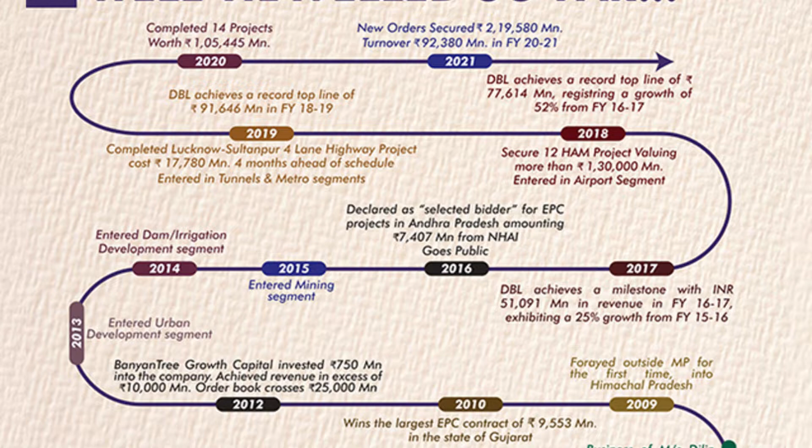We started the journey in 1988 and travelled so far with the annual turnover in 2021 of 92,380 million, along with new orders of 2,19,580 million.

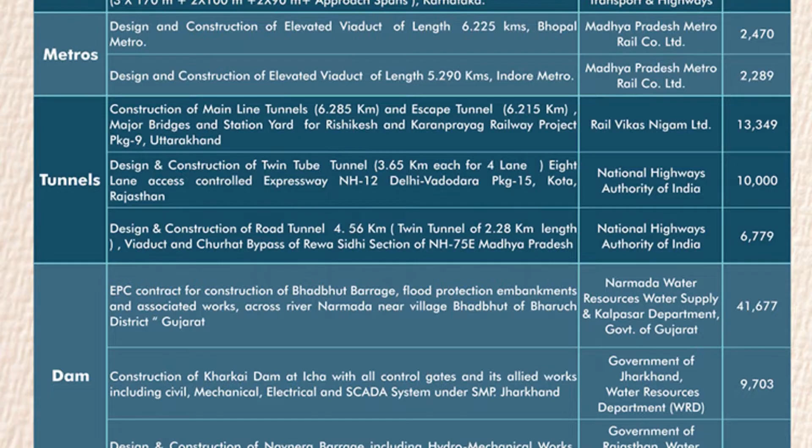Coal mining details. Dilip Buildcon has got a contract from Coal India owned Mahanadi Coalfields Limited for a mine developer cum operator contract for the development and operation of the huge Siarmal open cast project.

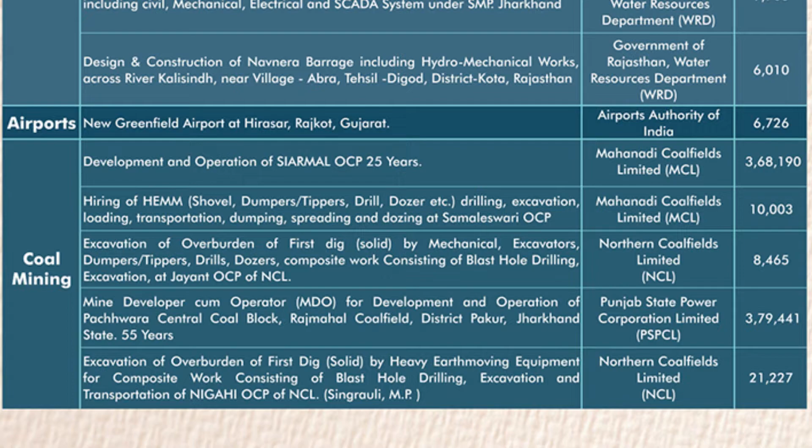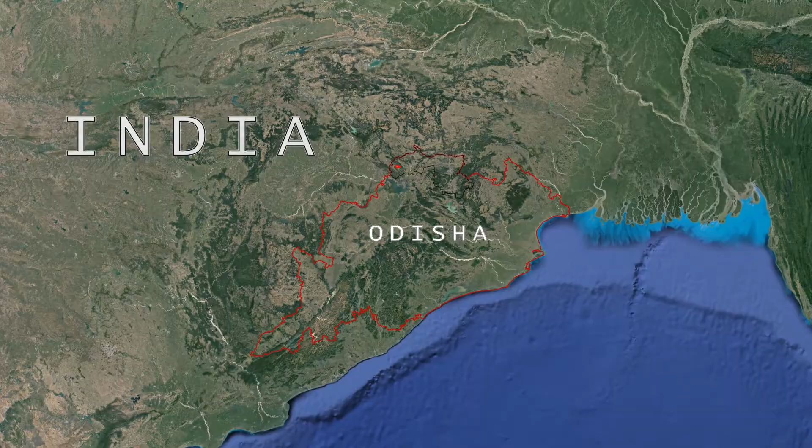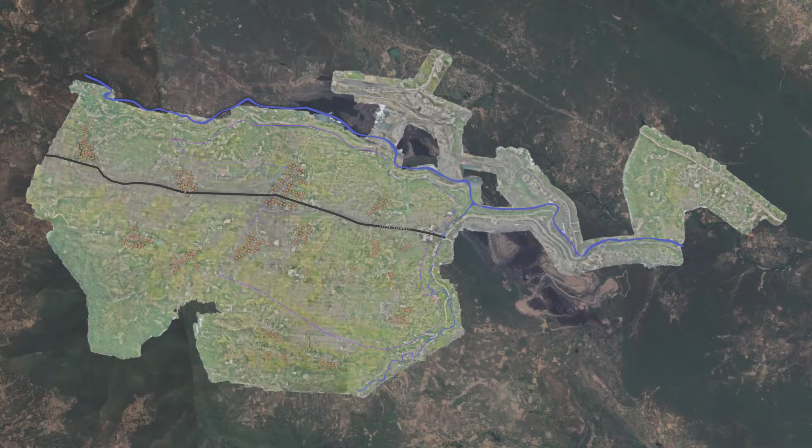The Siarmal open cast project is located in the northwestern central part of the IB Valley coalfields of Odisha, known as Gopalpur sector, and falls mainly in Sundargarh district of Odisha. The contract value is Indian rupees 36,819.07 crores and the contract period is 25 years. Mine lease for life of the mine.

Mine ultimate pit limit. Mine working boundary for 25 years as provided to Dilip Buildcon Siarmal Coal Mines Private Limited. The area consists of 5 villages, namely Siarmal, Jhupuranga, Tumulia, Ratansara and Gopalpur. Sundargarh-Raigarh Interstate Highway passing adjacent to the OCP.

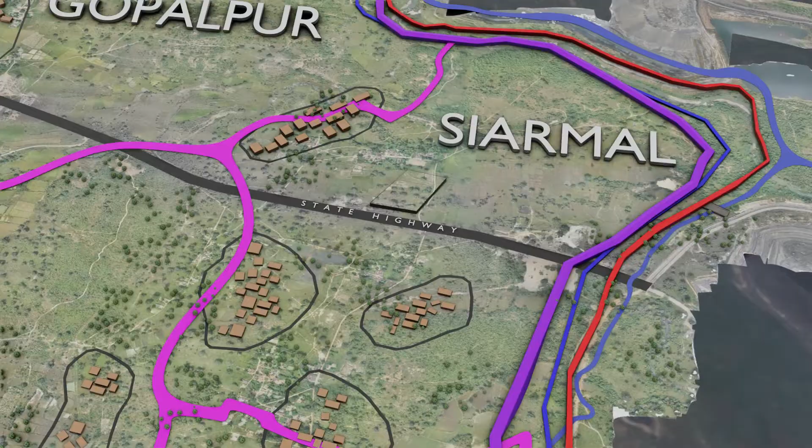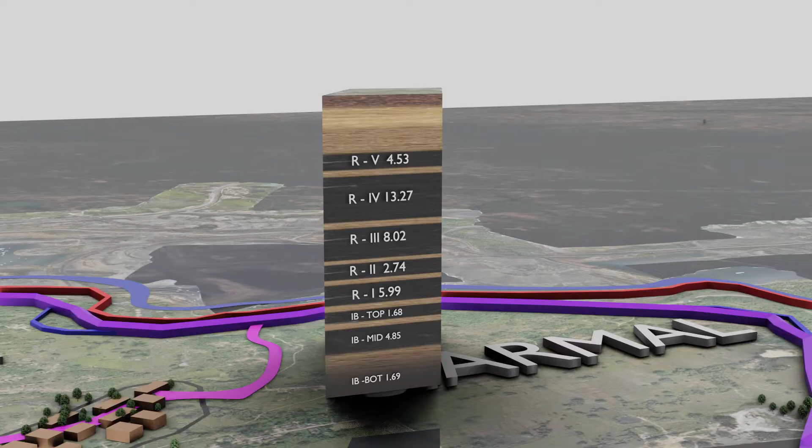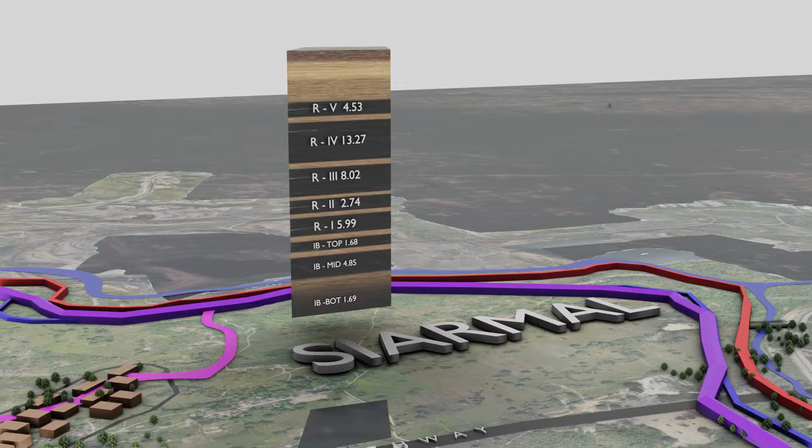In Siarmal and Siarmal Extension and Banapatra block, a total of 16 correlatable coal horizons or seams have been identified. Among these seams, Rampur 1, 2, 3, 4, Lajkura 1, 2B, 2T1 and Lajkura 4 are the most potential thick coal horizons in this block.

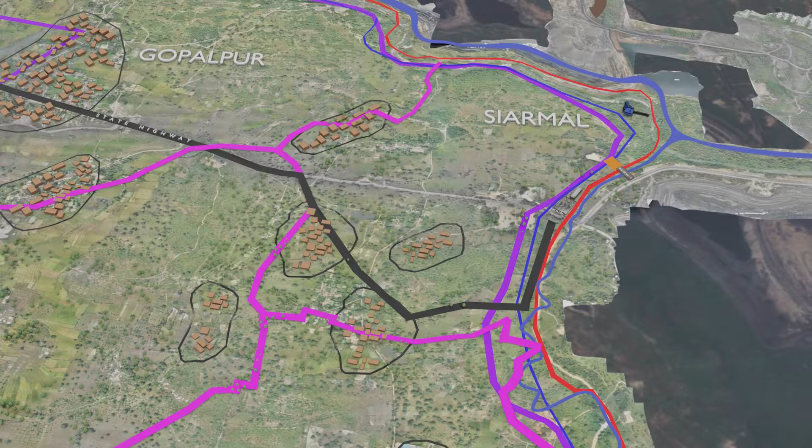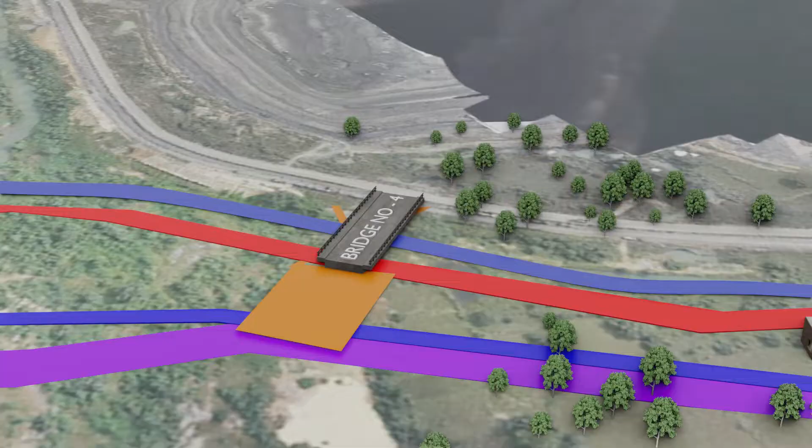The existing state highway from Sundargarh to Raigarh is proposed to be initially diverted since it passes across the Kulda and Siarmal OCP. Bridge number 2 is mainly meant for connecting Siarmal mines and Basundhara mines, and the bridge is over Basundhara river, used for transportation of overburden during initial years from Siarmal to the existing Basundhara decoaled area. Bridge number 4 is for the purpose of coal transportation, connecting Siarmal mines with the siding.

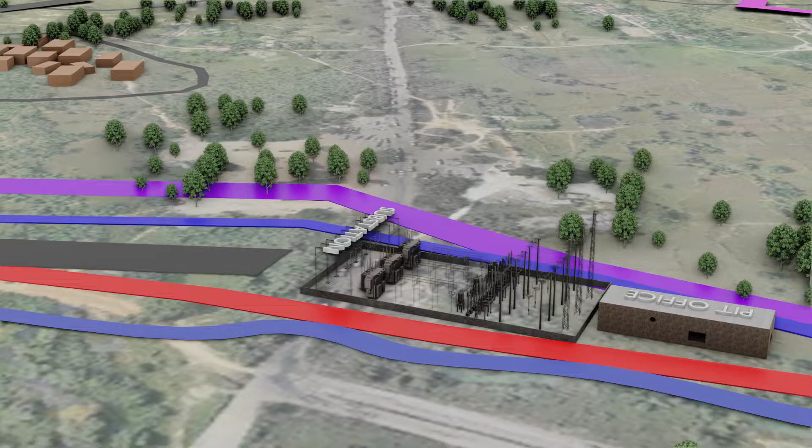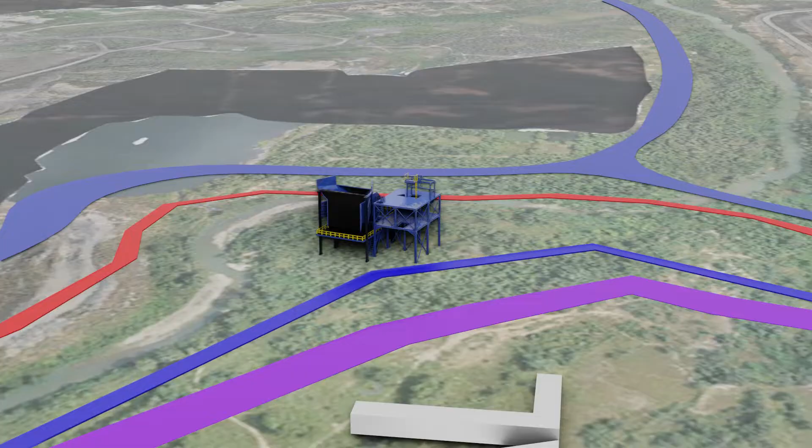The project will receive power initially by local grid and afterwards at 33 kV from the 33 kV overhead line coming from the 220/33 kV substation at Garjan Bahal. This is the pit office. Coal handling plant is needed for handling coal coming from mines, loaded to trucks and dispatched to the siding.

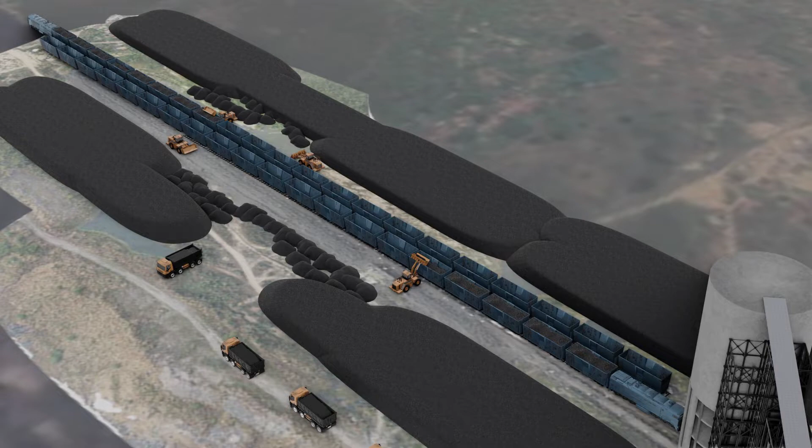The existing nearby siding is the Sardega siding, which is an operational coal siding having a capacity of 18 million tons, at present handling 12 million tons of coal from adjacent mines of Kulda, Basundhara and Garjan Bahal. By the introduction of a rapid loading system, capacity of Sardega siding will be enhanced by 20 million tons. This will cater to the requirement of Siarmal coal production in initial years.

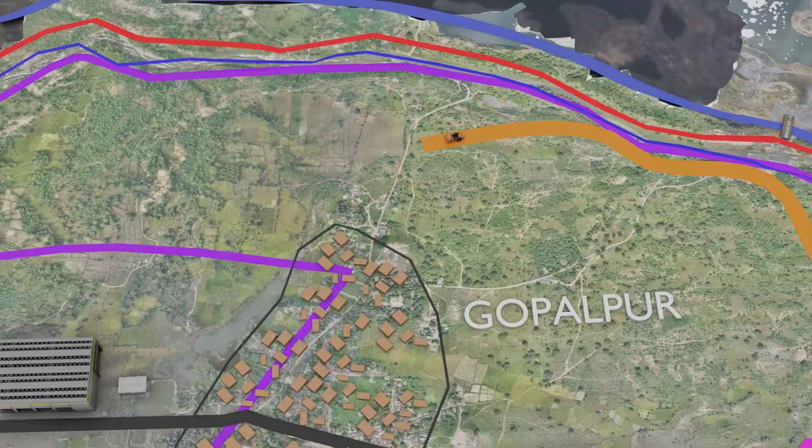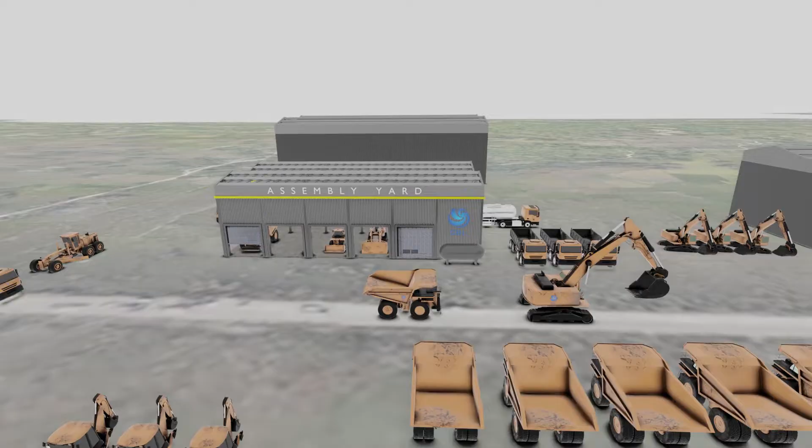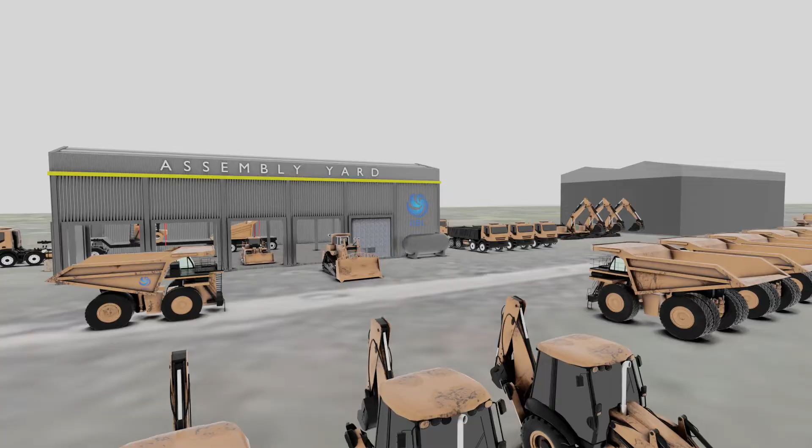Internal road connecting to the mine workshop and infrastructure, so as to facilitate transport of material and equipment from and to mines, workshops and fuel stations. A state-of-the-art workshop is planned to cater to the maintenance requirements 24 hours and 365 days of all miscellaneous and other equipment. All the machines after maintenance and thorough checkup go to the mines through the service road provided for the purpose.

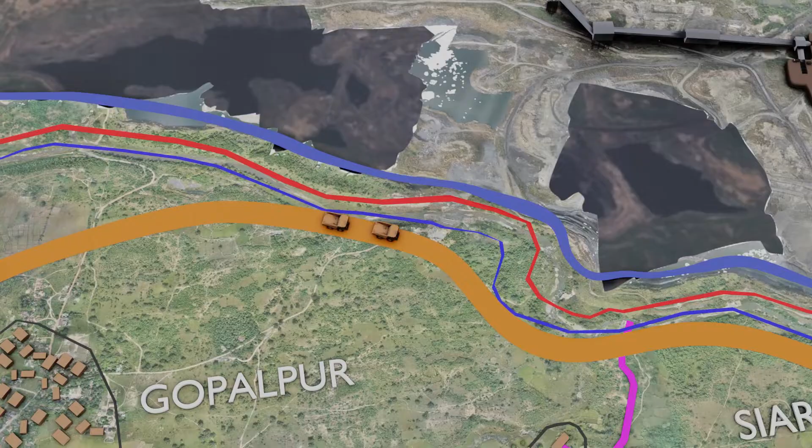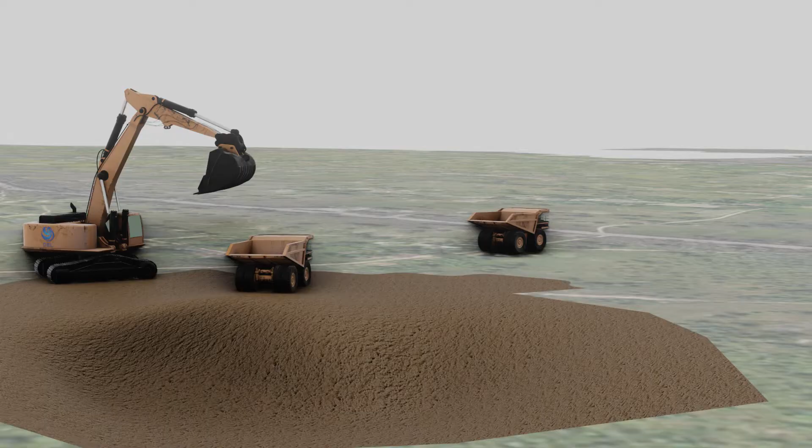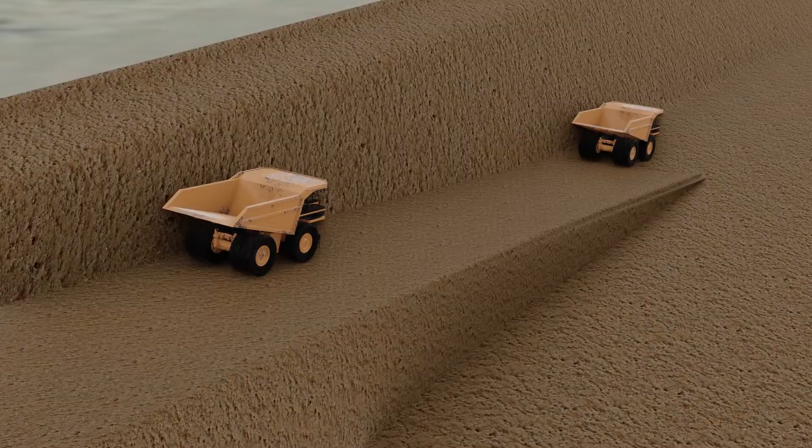Initial mine opening will be near the outcrop of Lajkura 3 and 4 seam, so box cut. An access trench will be started towards north of borehole number CMHG 179. This will be driven towards south to touch the floor of the above mentioned seam. Mine strike will initially be limited up to a width of 900 to 1000 meters towards west. Later, this access trench will be turned towards north to touch the floor of lower seams.

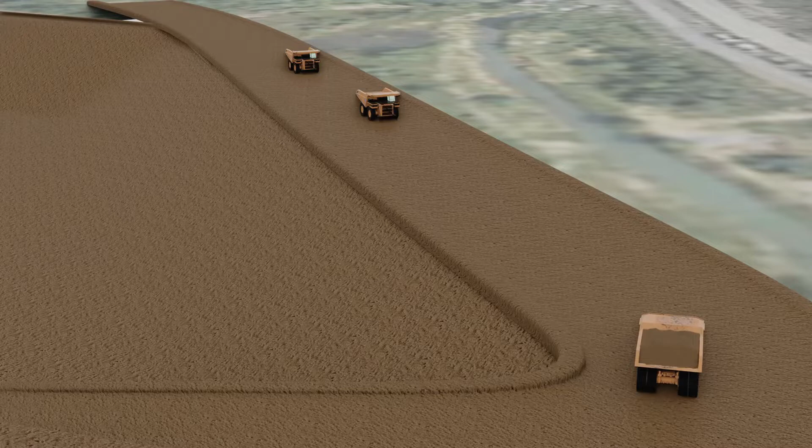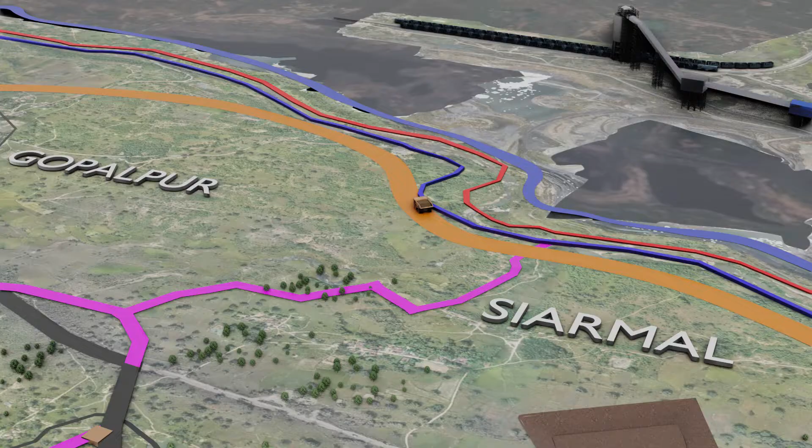The access trench will have sufficient width to accommodate two-way transportation for bigger HEMM, and the mine will be operated with suitable height and width as per mine plan. The topsoil which will be taken out will be transported through haul dumpers, segregated and preserved at a designated place and reused for restoration of mines.

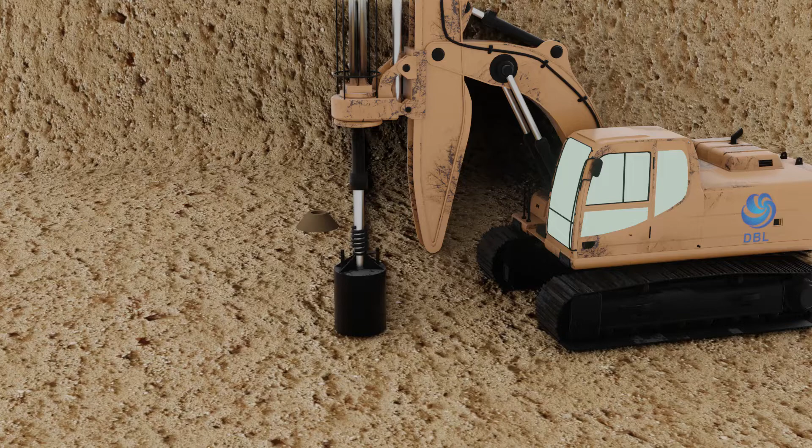After topsoil removal, the mine will encounter hard strata for which drilling and blasting would be required. Drill size of 200 to 250 mm diameter with suitable explosive for blasting and loosening the material.

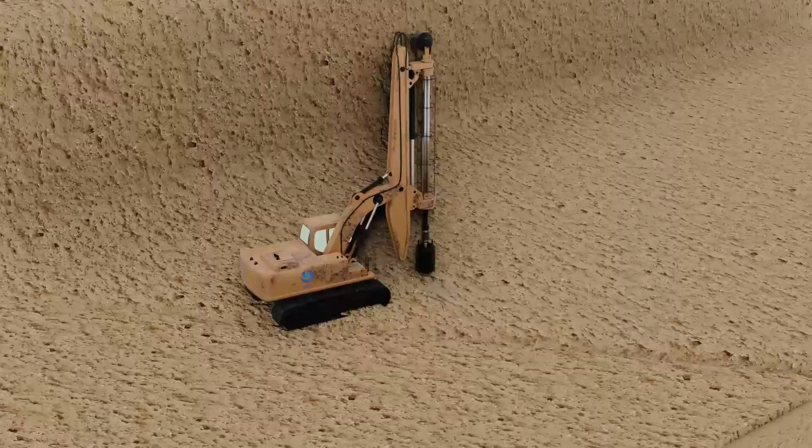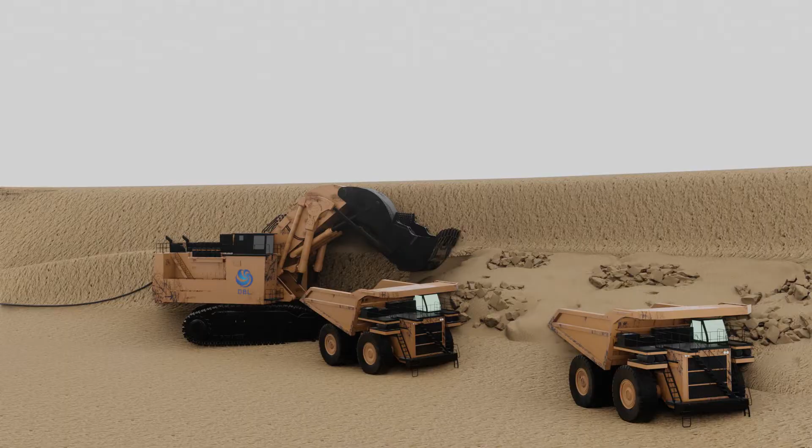After blasting, the excavator would be able to load the overburden into haul dumpers and transport it to designated overburden dumps. A suitable embankment is constructed along the Basundhara River 3 meters above high flood level, and the same embankment will be used for diversion of the state highway. A road is to be constructed for the diversion of Sundargarh-Raigarh along the Basundhara embankment.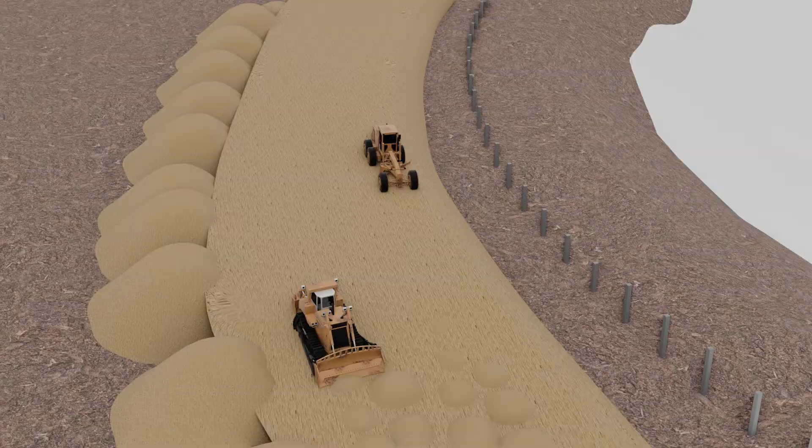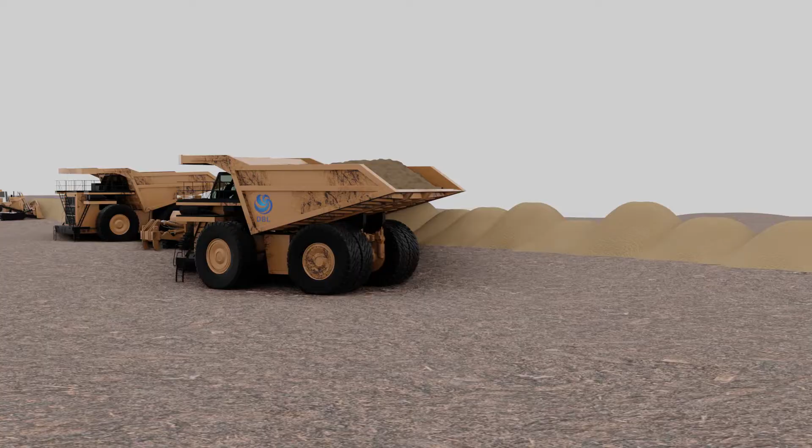Bridge number 2 is mainly meant for connecting Siarmal mines and Basundhara mines, and the bridge over the Basundhara River is used for transportation of overburden during initial years from Siarmal to the existing Basundhara decoaled area. 77 million cubic meters of overburden will be dumped into the already excavated decoaled area of Basundhara mine in 5 years.

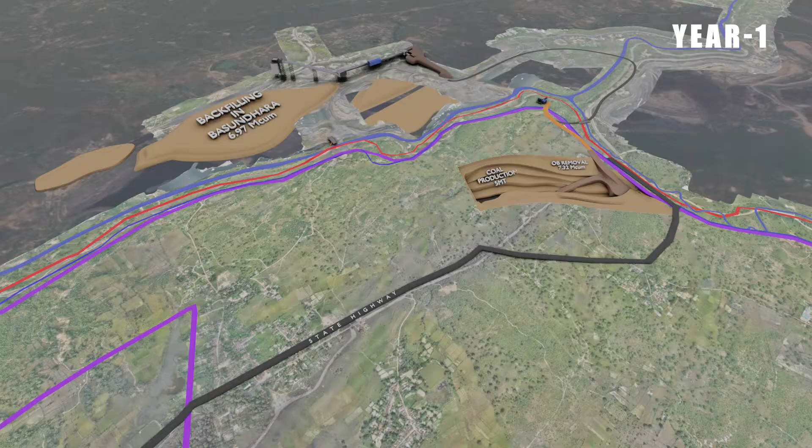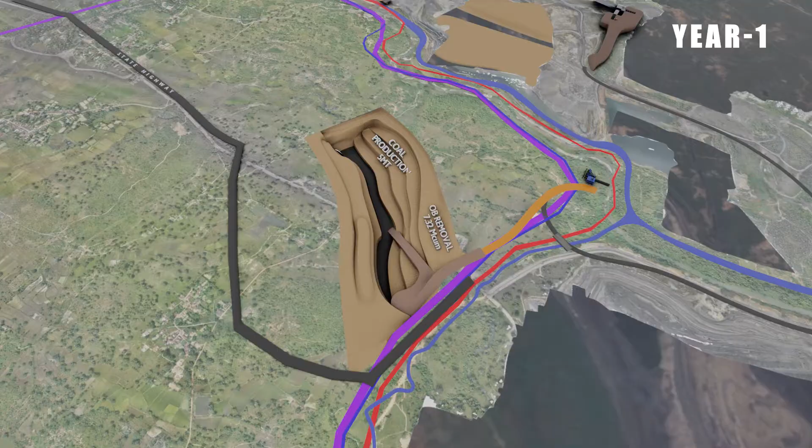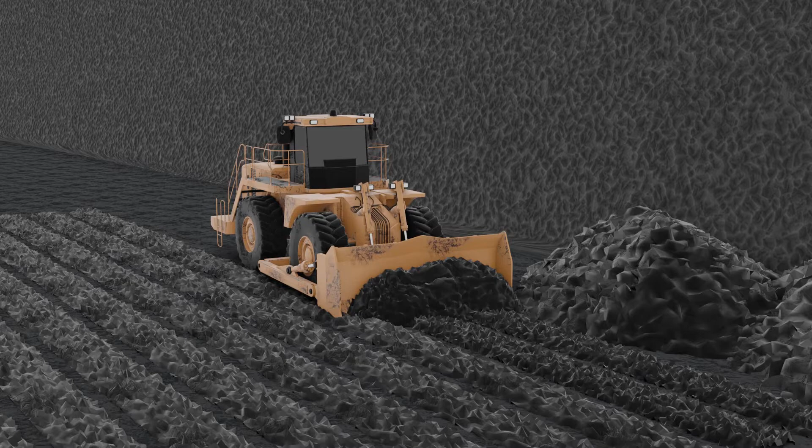In year 1, a total of 7.32 million cubic meters of overburden will be excavated and 5 million tons of coal is to be extracted. Coal mining will be carried out through blast-free technology, which is environment friendly. Surface miners will be used for cutting coal of sizes less than 100 mm so as to avoid further crushing. Coal cut by the surface miner will be loaded by payloader into the dumpers and transported to the surface coal dump yard.

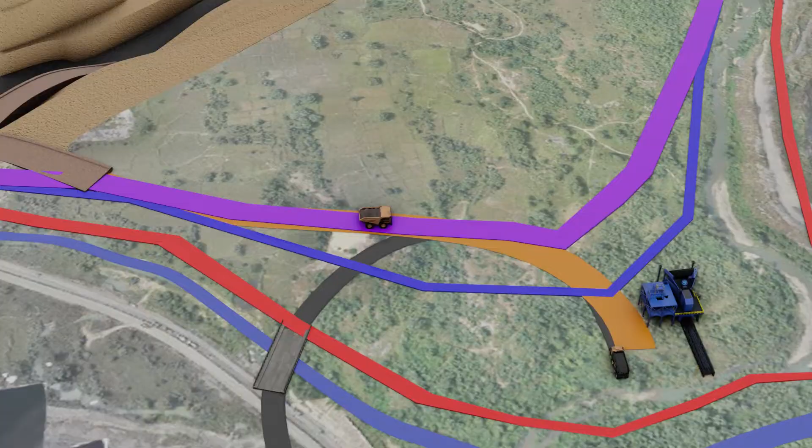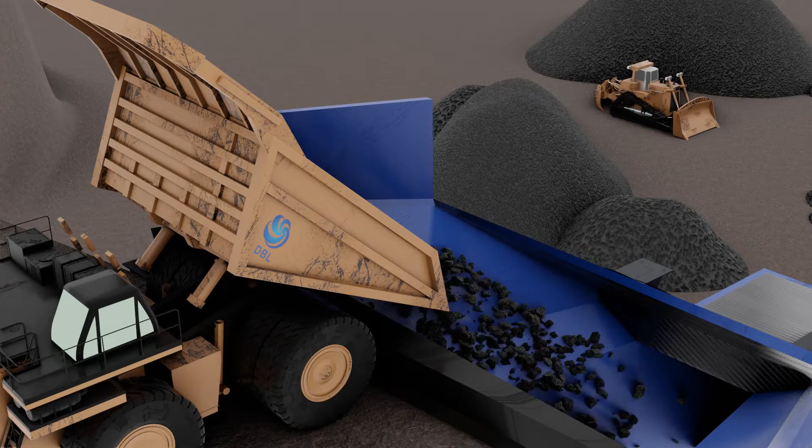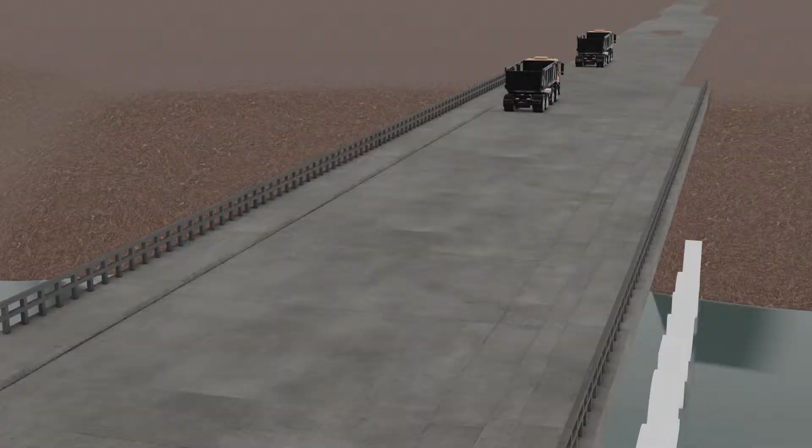A properly designed reclaim feeder will be provided to match the coal production with dispatch of coal by truck. Coal will be transported by tipper trucks via bridge number 4 to Sardega siding, which in turn will load the wagons for dispatch to the final destination. Sufficient width will be provided and safety rules as per modern traffic rules will be followed.

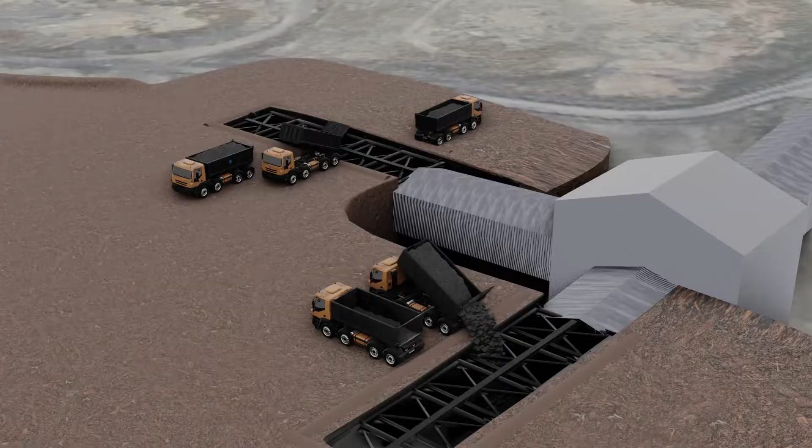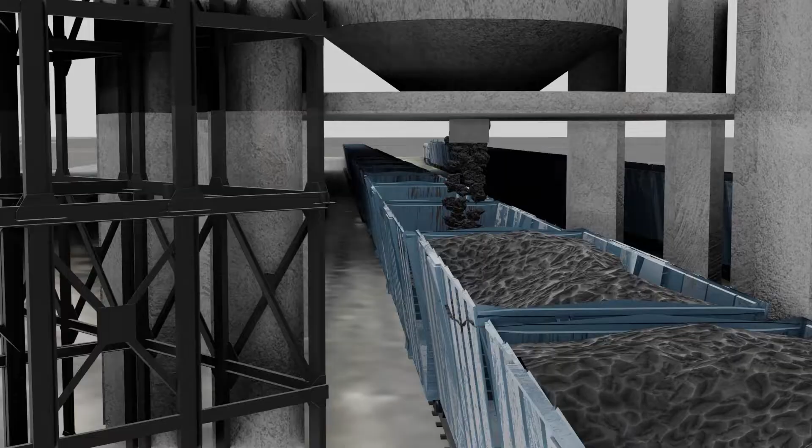The receiving hopper at the rapid loading system is being designed so as to receive coal from 20 coal tippers at a time. Coal will be conveyed from bunker to silo through belt conveyor. Coal will be controlled through a hydraulically operated chute loading onto box wagons.

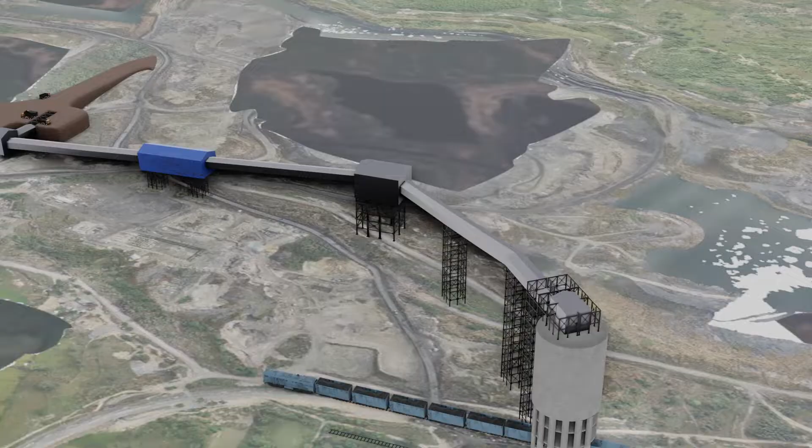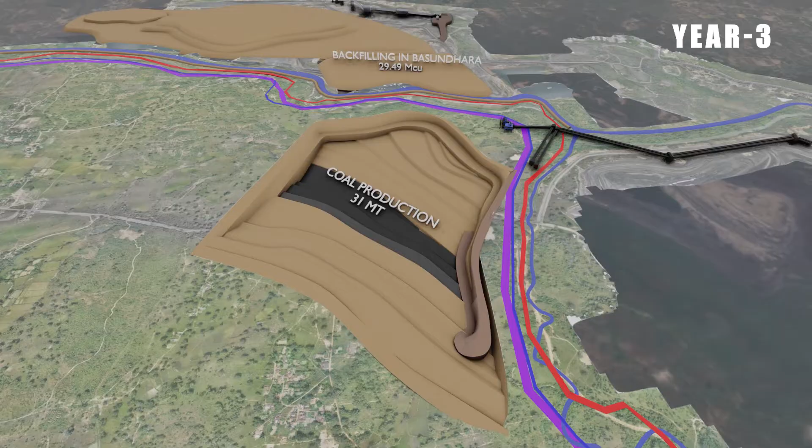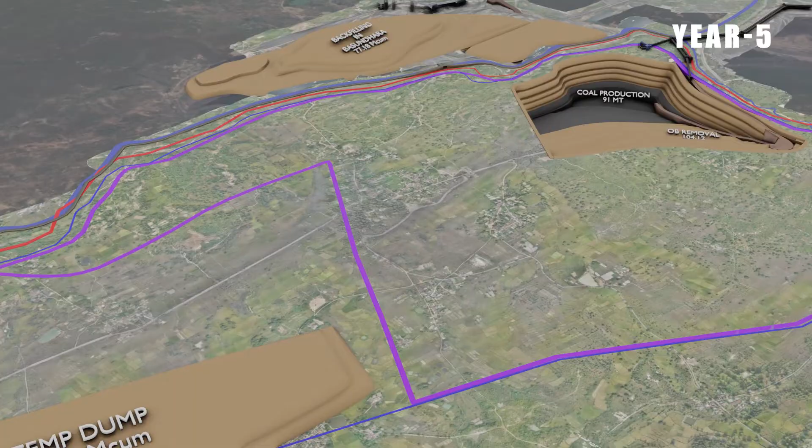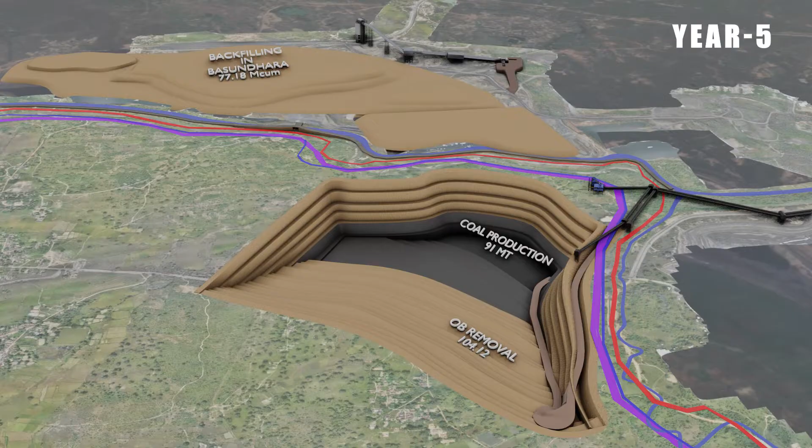In the third year, a total of 31 million tons of coal will be extracted and 29.49 million cubic meters of overburden will be dumped into the Basundhara decoaled area. By the fifth year, temporary dumping will be started after filling of the Basundhara decoaled area, which accounts for 77.18 million cubic meters of overburden. A total of 91 million tons of coal will be extracted by the end of the fifth year.

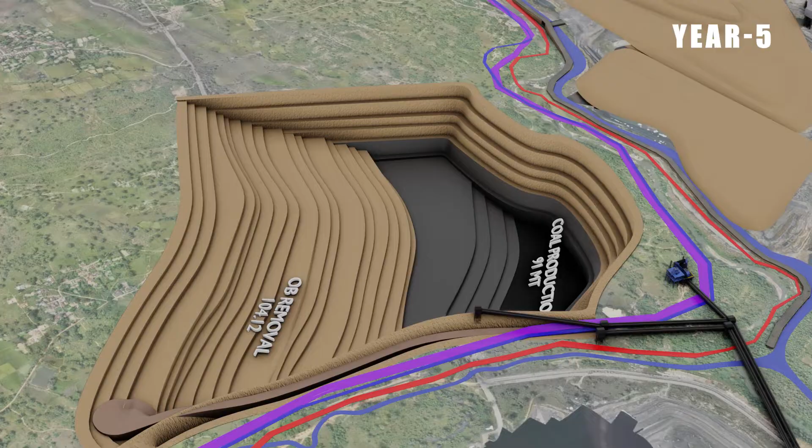The existing state highway from Sundargarh to Raigarh is diverted. The alignment of the proposed diversion will initially be along the embankment of the Basundhara river temporarily, and later it will be to the south of the proposed Siarmal OCP. After final diversion of the state highway, a flyover will be constructed to avoid any interference between highway traffic and mine traffic.

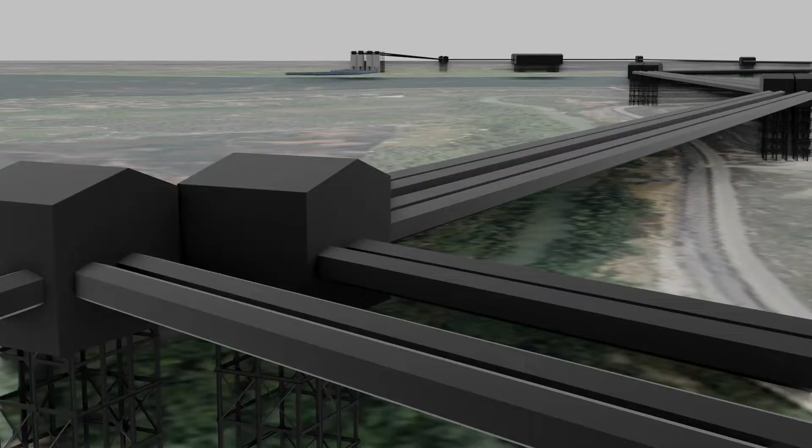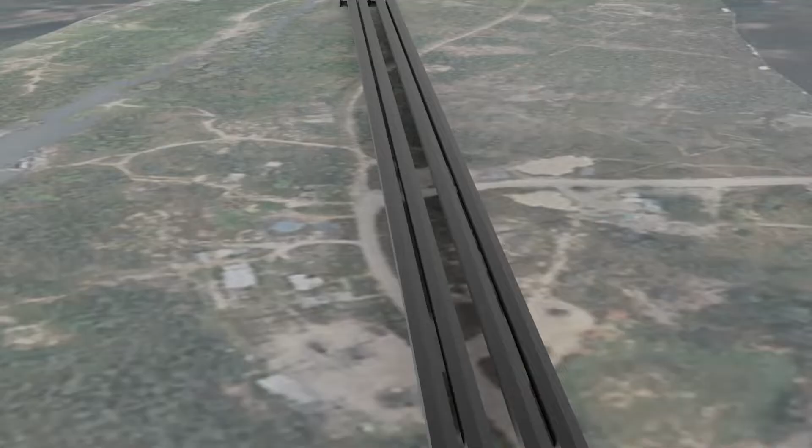At the end of the fifth year, when the mine will be provisioned with coal conveying right from the pit bottom through the CHP to Barpalli siding, a 5.5 km belt conveyor will be constructed for connecting Barpalli siding. Barpalli siding will be provisioned with a bunkerage of capacity 40,000 tons. The Barpalli loop is designed for receiving and loading 4 racks through four 1,000 ton capacity silo pre-weigh hoppers.

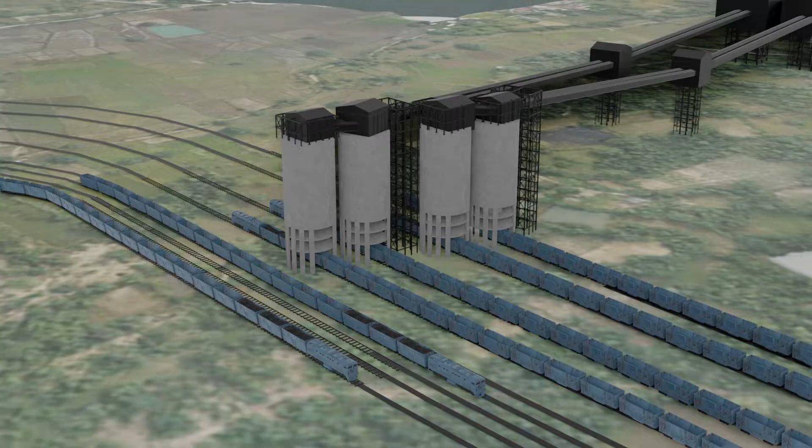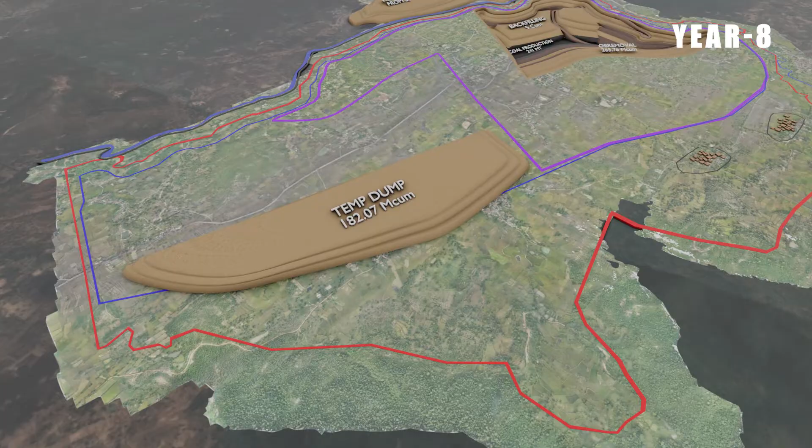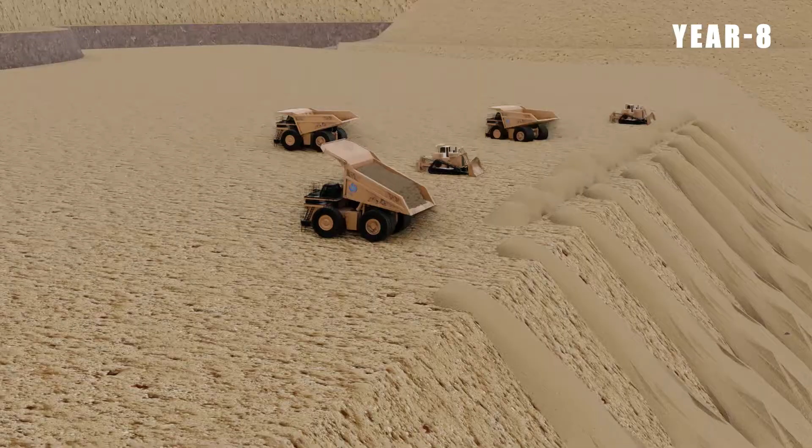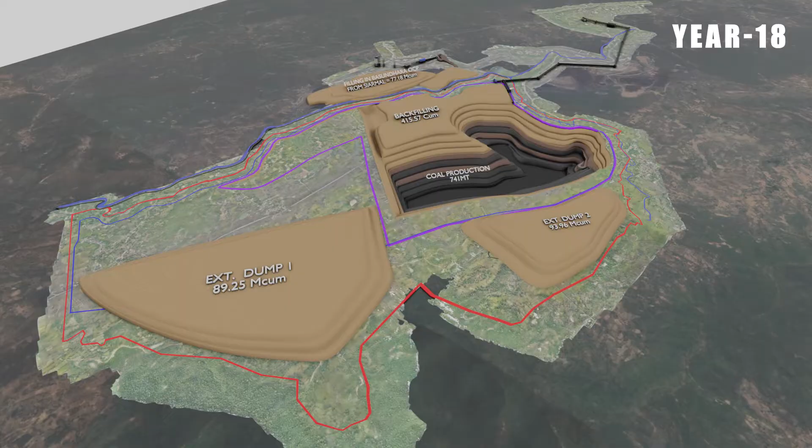By year 8, 182.07 million cubic meters of overburden will be dumped in the temporary dumping area and 241 million tons of coal will be extracted from the mining pit. Once the bottommost seam from the rise side is extracted, backfilling will be resumed and will follow the decoaled area. After filling of Basundhara mines, this overburden will be sent to the designated dump number 1 and dump number 2 towards the southeast and southwest of the mine respectively, and backfilling in the decoaled area will be continued as per the mining plan. A total of 741 million tons of coal will be extracted till the 18th year.

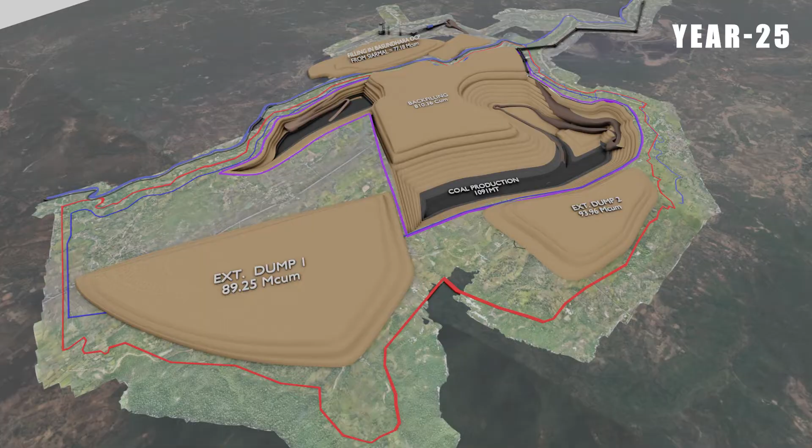By the end of the 25th year, coal production will reach 1091 million tons. In external dumps 1 and 2, overburden will be dumped of size 89.25 million cubic meters and 93.96 million cubic meters.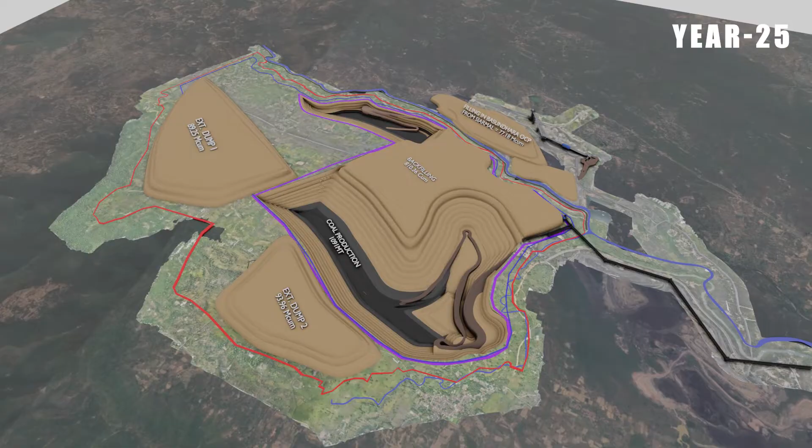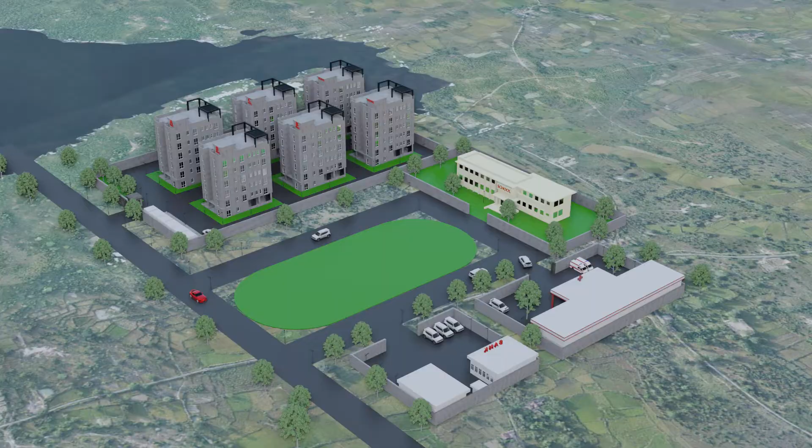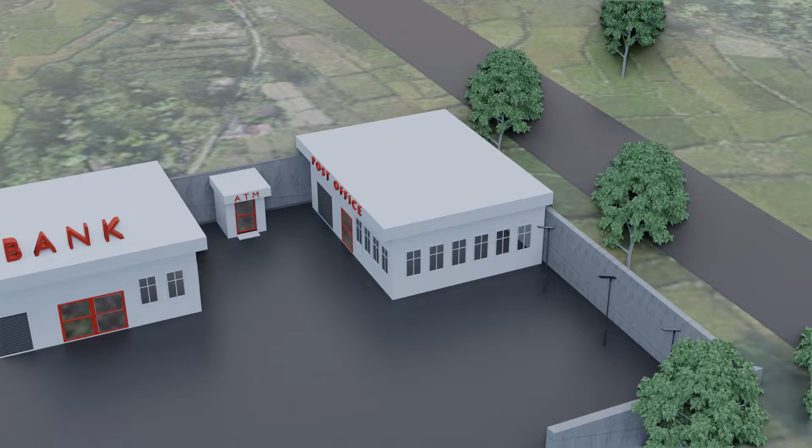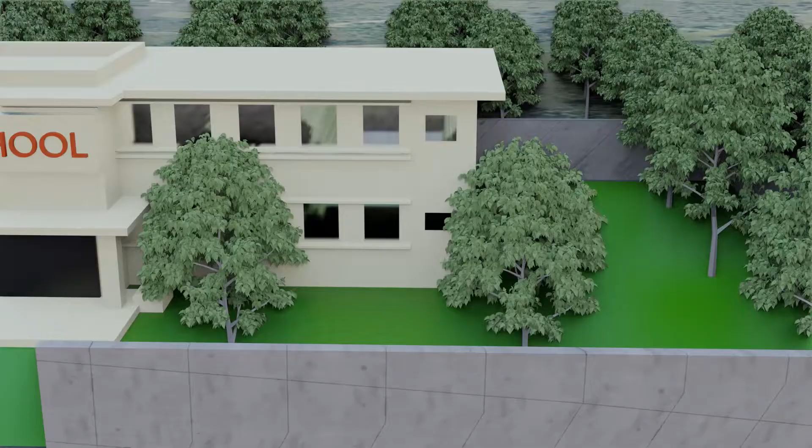A project colony having all modern amenities with a capacity of 611 dwellings: A type 54 quarters, B type 522 quarters, C type 35 quarters, and hostel type accommodation of 157 numbers, with full facilities such as ATM, bank, post office, community center, and school to provide comfortable living for the employees.

Till date, Siarmal opencast with a capacity of 50 million tons per annum will be the highest producing mine through MDO mode.